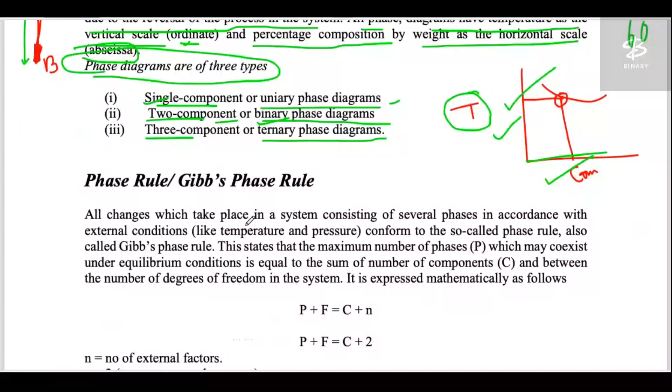What is the phase rule, also known as the Gibbs phase rule? Gibbs was a scientist who gave this particular formula. That's why, as a kind of honor to the scientist, it's known as the Gibbs phase rule. So this is basically the phase rule.

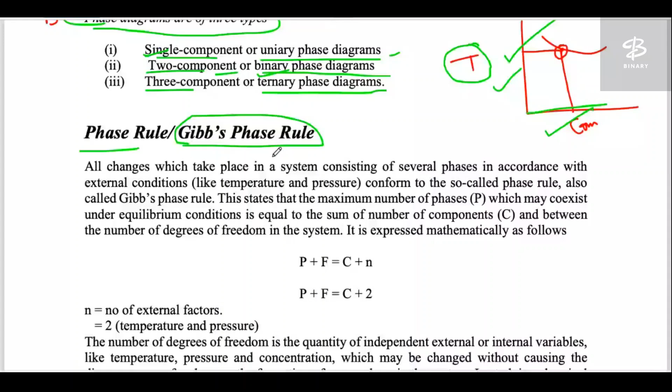So what is the phase rule? All the changes which take place in a system consisting of several phases in accordance with the external conditions like temperature and pressure. So what kind of changes take place in phases according to your temperature and pressure? If you are altering either your temperature or pressure, then you would have different phases.

A very good example is water. If you keep the pressure of the water constant, at atmospheric pressure throughout, and you raise the temperature of that water to 100 degrees C, then it starts changing its phase. So what does it mean? It means you have kept one thing, pressure, constant, but you have altered the temperature. So this is basically the criteria.

If you change the temperature and pressure, then you would have different phases, but not as soon as you change the pressure; only at a particular point, which is the critical point. So corresponding to any temperature, you would have the corresponding critical pressure, and if you keep the pressure constant, corresponding to every pressure you would have your critical temperature.

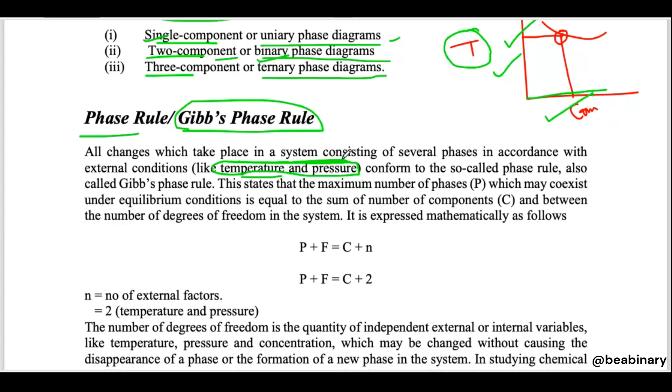So for everything you have the critical pressure and critical temperature. So this is known as your phase rule, also called the Gibbs rule. This is the condition of how phase changes occur according to temperature and pressure.

How can we define it? It states that the maximum number of phases which may coexist under equilibrium conditions is equal to the sum of the number of components C and the number of degrees of freedom in the system. What is the degree of freedom? Degree of freedom means how many independent variables there are in your system.

In the case of temperature and pressure, you must fix one thing. You cannot vary both of them together. If you have kept your temperature constant, then you can vary the pressure. If you have kept your pressure constant, then you can vary your temperature. It means in this case you have only 1 degree of freedom.

You have to set the pressure constant, then you can alter the temperature, and if you have set the temperature fixed, then you can alter the pressure. It means you have only 1 degree of freedom. Degree of freedom means the variable which you can vary directly without thinking about anything; they are not dependent on others.

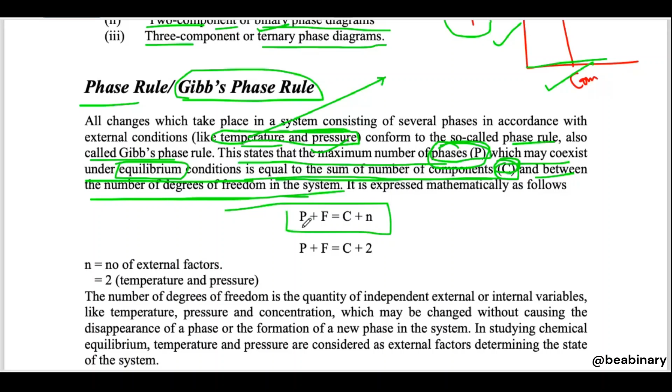So degree of freedom and component will define the number of phases which may coexist under equilibrium. Equilibrium is a very obvious condition; without equilibrium, you cannot define anything. It is equal to the sum of the number of components C and the number of degrees of freedom in the system. So we have P plus F is equal to C plus N.

N is the number of external factors. In this condition, if you have temperature and pressure only, then you can replace N with 2, because these two are the external factors. C is the component, and F is your degree of freedom.

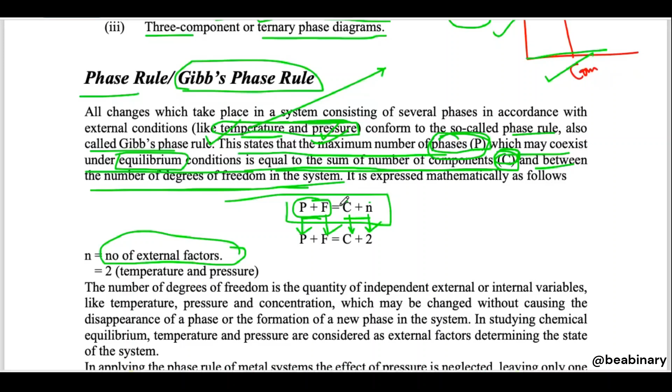And if we talk about the P, then P is a phase. So, phases plus degree of freedom is equal to C plus N. C means the components, plus the external factors. But if we modify further, if we have only the two conditions, temperature and pressure, which are the external factors, then we have this particular equation: P plus F is equal to C plus 2.

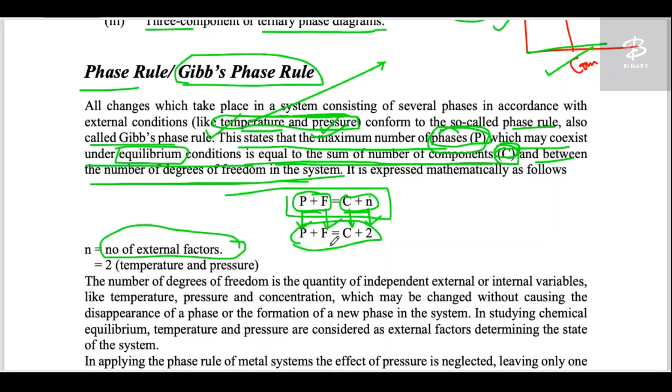But if we take the example of water as we are boiling, then we basically keep our pressure constant. So pressure is constant. It means you have only one thing which you can vary, which is temperature. So temperature is your variable, the external factor that you rely on. So you can put the N value as one only, in the case of boiling the water.

So in the boiling of water, you basically have the different phases as well: solid to liquid, ice to liquid water, and water to steam or vapor. So in that case, this phase rule will modify like P plus F is equal to C plus 1. So this is your formula for the particular condition in which you have constant pressure.

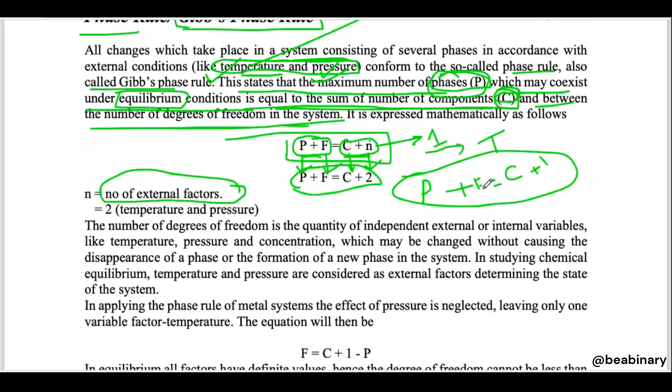Or think about a different condition where you have temperature constant and you are varying your pressure. The same formula will go with that, because it depends on how many N's you have. N means the number of external factors. So you could have only one, or you could have three as well; it depends on your conditions.

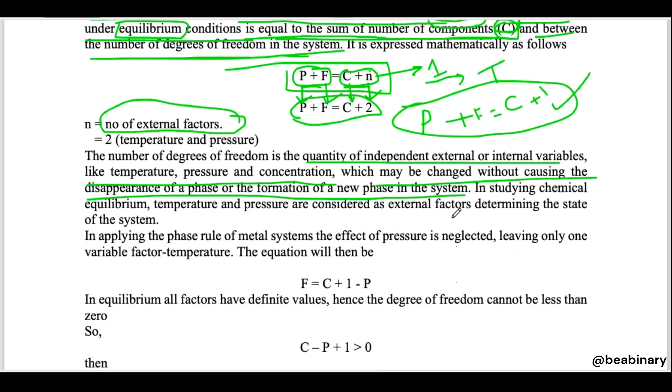So the number of degrees of freedom is the quantity of independent external variables. I have already defined for you what the degree of freedom is: what we can change without causing the disappearance of phases or the formation of a new phase in the system. In applying the phase rule for the metal system, the effect of the pressure is neglected, leaving only one variable factor, temperature. The equation would be like this.

Neglected means what? Neglected means they are being kept constant. So in such cases where the pressure is almost constant, you can modify the Gibbs phase rule to this one, F is equal to C plus 1 minus P. It's just a modification of this particular equation: you have kept this and taken P from left to right.

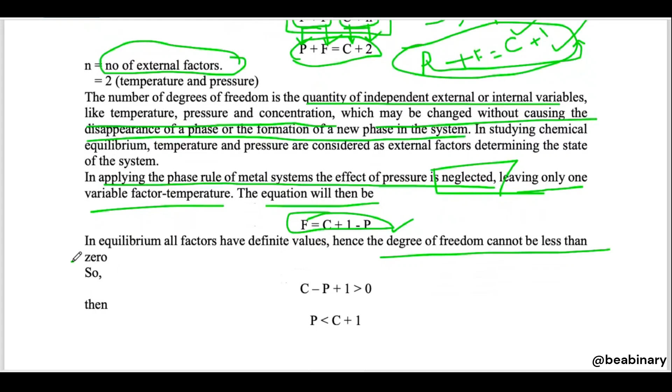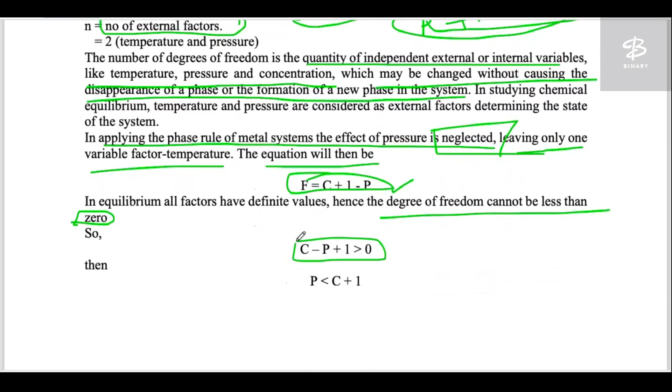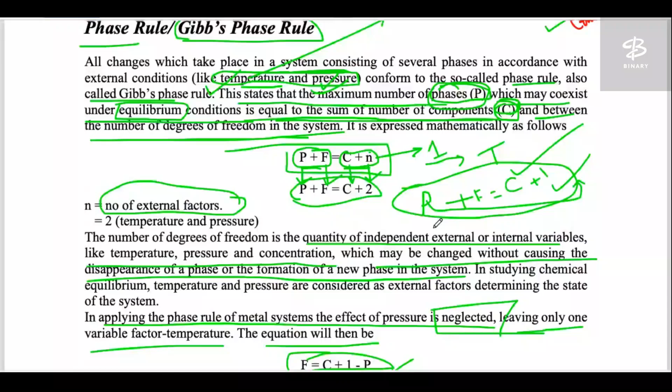So in equilibrium, all factors have definite values. Hence, the degree of freedom cannot be less than zero. It could be zero, but not less than zero. So you have this particular formula, and according to this, P is always less than or equal to C plus 1. C is the components, how many components are there. This shows that the number of phases in the system cannot exceed the number of components plus one.

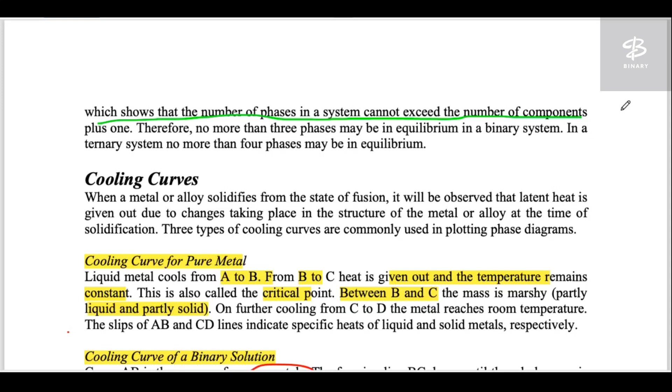Do you understand? If you have defined the number of components, your phases cannot be more than your components plus one. So if you have only two components, your phases must not exceed 3. If your components are 3, your phases must not exceed 4. So this is the idea from your phase rule, a very notable thing: how phase depends on your components. If your component is 1, your phases cannot be more than 2. It's plus 1, as you can see in this formula.

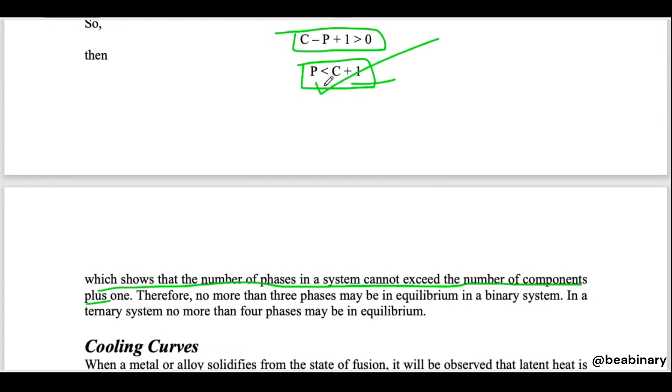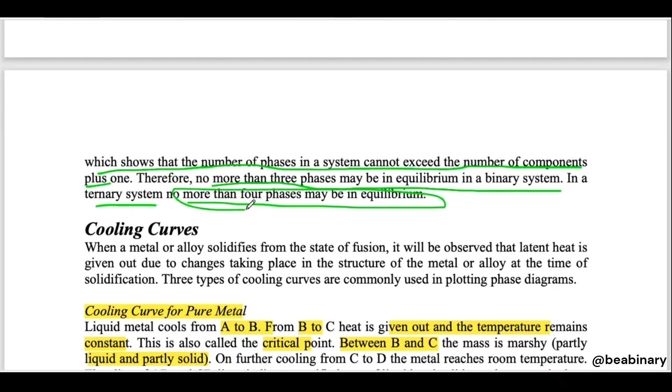So phase must be less than or equal to C plus 1. This is the maximum condition. You could always have less, but you cannot have more. Therefore, no more than 3 phases may be in equilibrium in binary systems. In a ternary system, no more than 4 phases may occur in equilibrium, which means if you have a 3 component system, you would not exceed 4 phases.